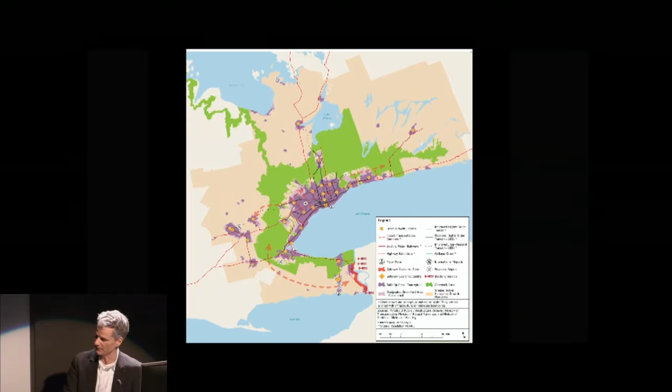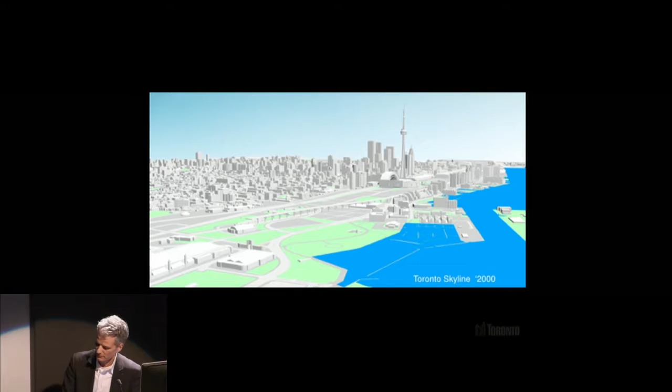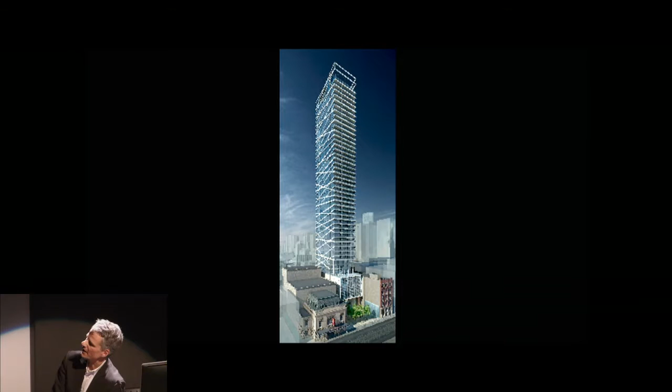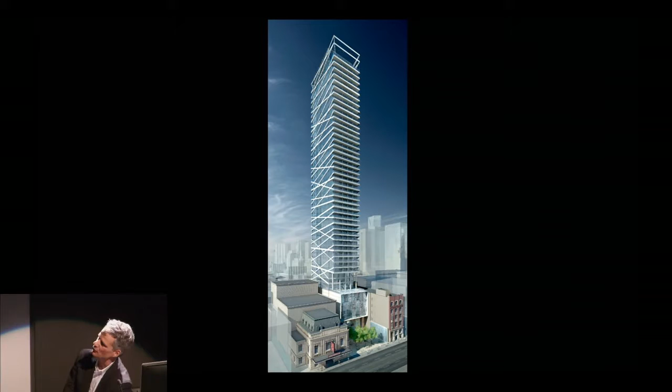This first project is the Theatre Park project, a sliver tower next to the Royal Alexandra Theatre, located in a parking lot that used to be a playing field owned by Upper Canada College. For the longest time it remained an undeveloped parcel. The city prescribed an 8-story warehouse building with punched windows going the depth of the site, but given the cost of the land, that scenario was undevelopable.

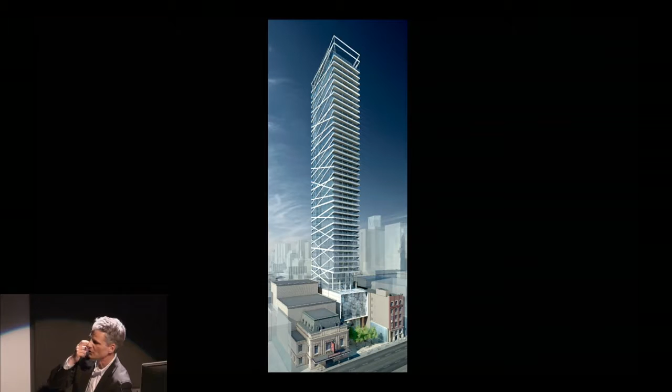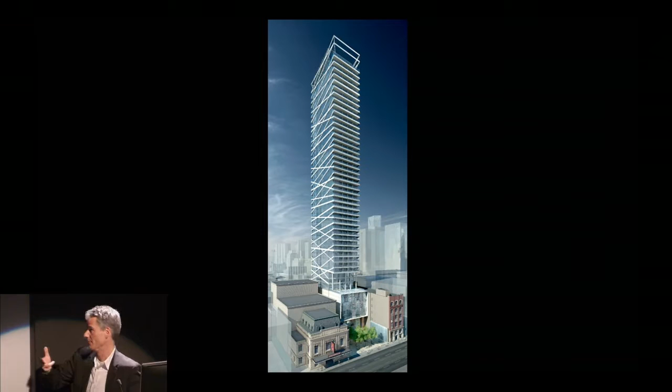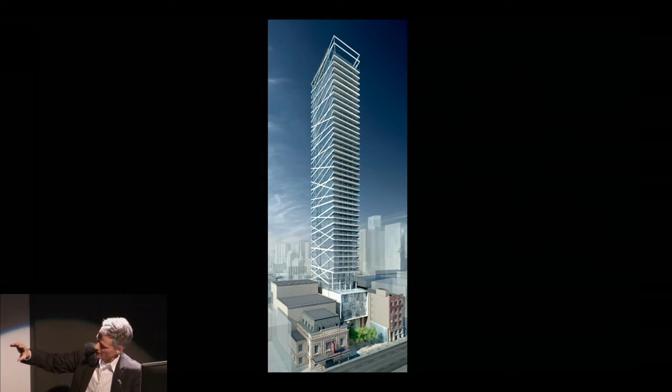So through a lengthy process of negotiation and redesign, we developed this tower as a sliver tower. It's deferential to the theater in the sense that the tower is lifted up above the fabric of the historic buildings. It's pushed back to create a forecourt off the side of the theater, and establishes a datum of podium elements that relate to the scale of the heritage fabric.

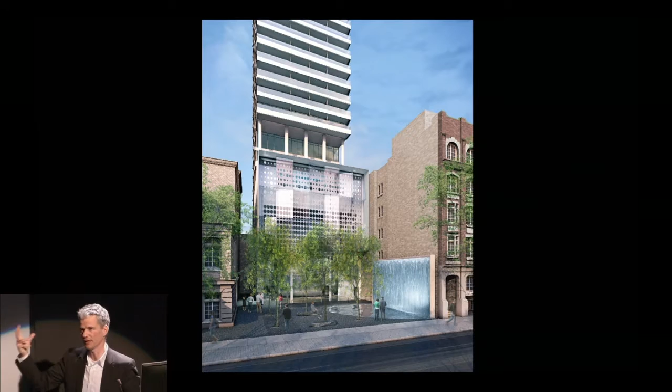So this looks at the podium and the relationship of scale of the elements. This building also has a full range of units and is mostly end-user occupied, meaning it's not investors that bought these, but people who have embraced this building — most of the people living there are the ones who bought the units. There's a wide range of units, so it really represents the spectrum of Toronto.

This is the base of the building, which will house a restaurant, and that plaza will eventually have outdoor seating for the restaurant. Then the upper stories are the amenity areas for the tower, and there's a pool on the roof — also an outdoor pool.

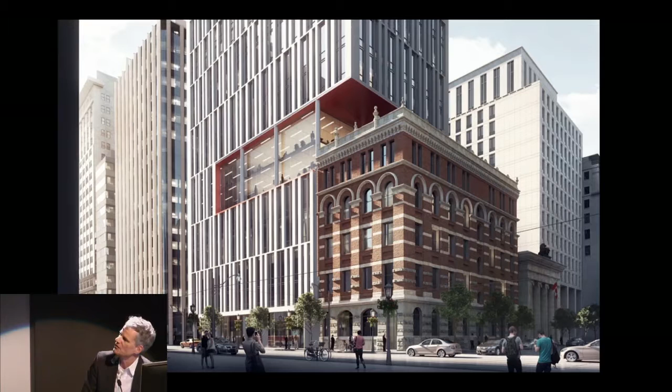This shows it from the other direction, and you see that the facade is an abstraction of the vertical pier facade common to a lot of bank buildings. We're playing with it using a skip-stop patterning, then making a definitive incision in the facade, cutting it out right in line with the heritage building to make a direct visual connection to it.

There's a great degree of public open space and landscape planning put into it as well. This is the next phase of the project, an interlaced tower where we interweave large post-tension concrete terraces to create deep terraces for amenity, given the great views of this location—that's the unique feature of the building.

This is an example of an older project in the office, relating to mid-rise, and an early example of the evolution of mid-rise in the city. We call it a new unplanned neighborhood.

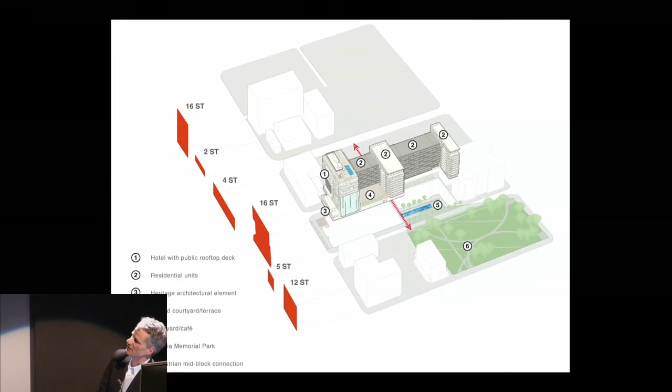This is a project called 550 Wellington, which happens at the convergence of Bathurst and Stewart Street, a complex scenario where you have the heights of buildings on Bathurst, and then step down to a consistent height across Stewart Street. What's interesting is that at the time, the city considered this a vestigial industrial area, not really part of the downtown core.

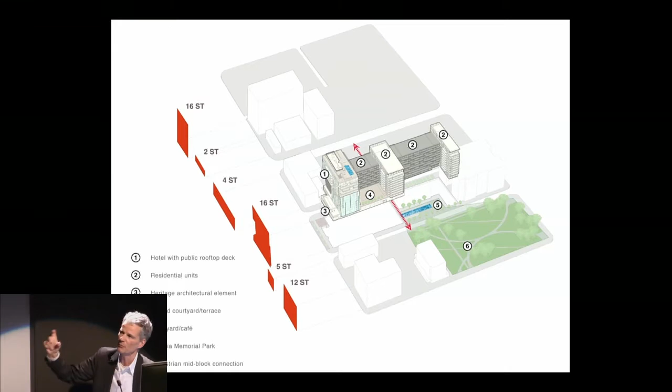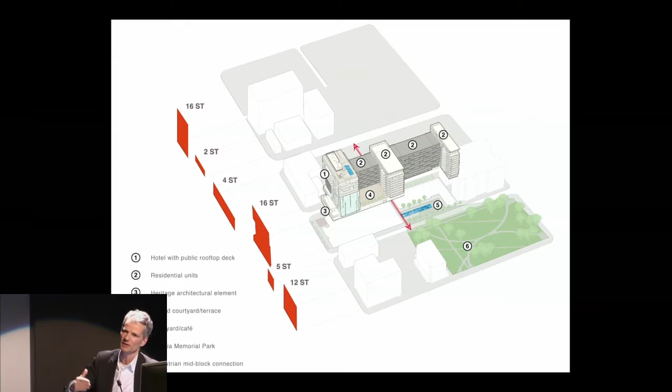It was really the vision of the developer, Peter Freed, who started buying up lots and developing small buildings, building on his own hype around the neighborhood, which slowly transformed this area until this final building, the 550, was built, incorporating a boutique hotel and residential units.

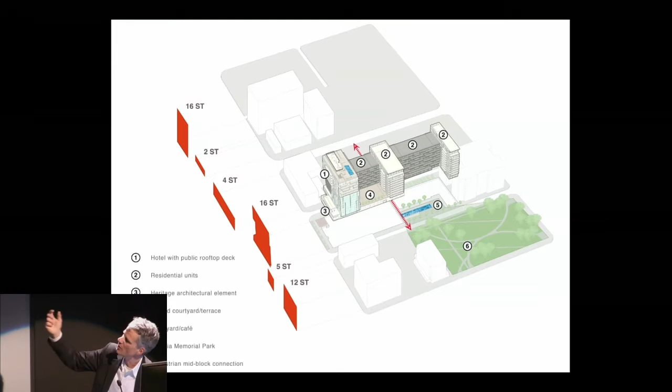The building has various faces: a special hotel tower on Bathurst, a long bar building which establishes the height datum of Stewart Street, and a series of two forecourts on Wellington which address the park and create amenity for the building itself.

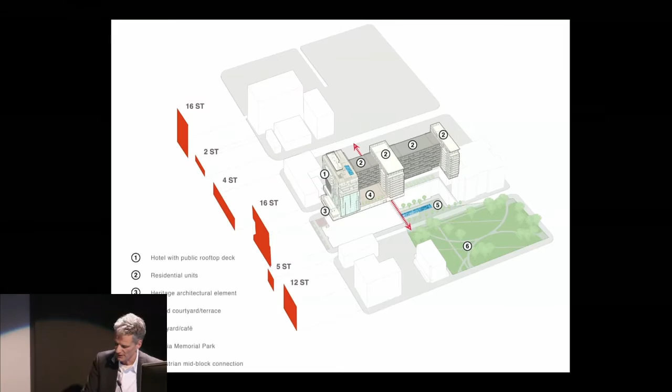I think on Stewart Street, out of that process—since there was no real planning framework for height and massing—we worked with the planner to establish a height datum. Now when you look at Stewart Street in particular, it's one of the nicer streets in the city core.

This looks at the forecourt and the entrance to the hotel.

And of course, with higher buildings, you have the opportunity to create great public space up higher, and this is the rooftop horizon edge pool and deck.

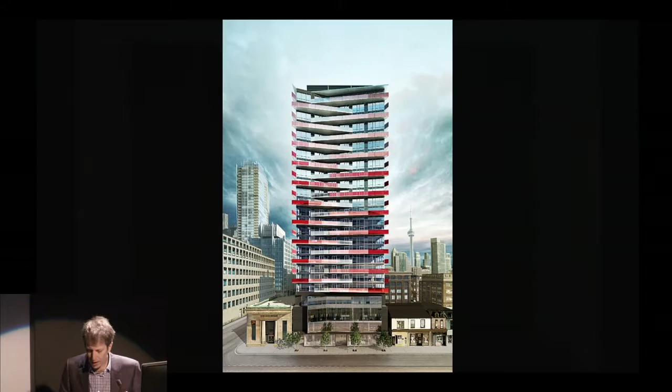In examining this area and looking at people moving back downtown, it became a real opportunity to do something a little bit different. What we did with our client was try to look at what you needed to live in downtown Toronto, and also rethink the traditional bathroom, bedroom, kitchen setup that people live in.

This was conceived as really trying to think about what you needed. Do people really cook at home anymore with Uber Eats and everything else? Do people hang out in their units? Do they socialize on the street in the bars and restaurants and all these other things? So what we tried to do was find a way to shrink these things down.

These units are actually incredibly small. We had to redesign some of them in the building because the average size was less than 400 square feet, and they couldn't get mortgage financing for the owners.

Part of it was questioning, for example, this kitchen and seeing what other things you could bring in there and what other spaces you can combine, and what other storage spaces you can bring in. So this is a kitchen with all your laundry, your storage, your dishwasher, everything in there, just shrunken down. And it sold incredibly well.

What we're seeing, or hoping to see, since no one's moved in yet, is that it's helping—it's just one part of a whole revitalization of these downtown areas, making them neighborhoods as people move into the streets, move back to the downtown core where now restaurants and shops and all sorts of things are coming back to parts of the city that no one used to live in. And it's really revitalizing it.

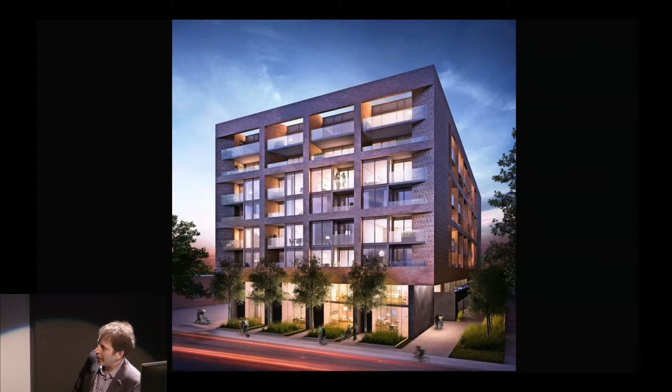And now for you guys, some mid-rise. This is actually across the street from one of your sites, or across the rail tracks, on Sorauren Avenue. It was recently completed, and it's just west of the rail seam that goes by the Sterling Road site.

It's interesting because it's basically the edge of the High Park neighborhood, which is an incredibly expensive and somewhat exclusive neighborhood now. One of the issues throughout the city is affordability. What this building did, by building on a rail seam in its backyard, was bring an opportunity for a lot of people to move into this great neighborhood at a more affordable cost.

The idea was a playful reinterpretation of the industrial warehouses that historically lined the rail seams—all along here were old warehouse buildings. We wanted to reinterpret that, taking the heaviness and massiveness of the masonry cladding and reinterpreting it. So the idea was that it kind of floats two stories off the ground, and it's carved out.

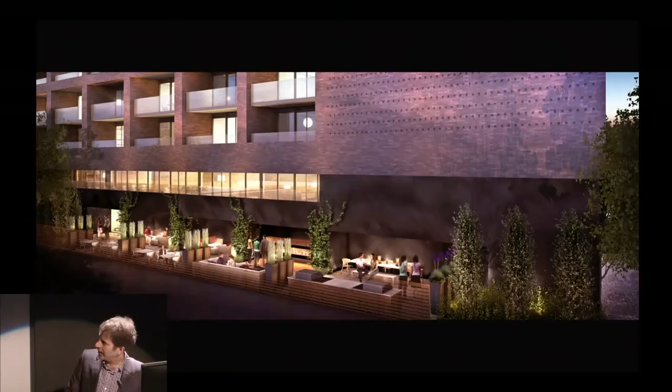I think we presented a lot of plans a few weeks ago, so this is what it actually looks like. But it's quite a beautiful building if you've looked at it as you've walked by.

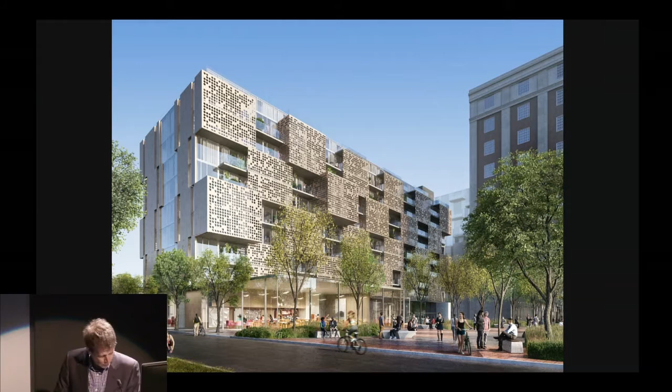And then onto one of our sites, 158 Sterling, another interesting project that's been marketed, and we're just dealing with soil issues right now.

It's another interesting part about residential construction in that this one literally subsidizes the cultural realm. This project is a whole brownfield site. On Sterling, there's the existing 10-story automotive building, which you see in the background. This project allowed our client to create some residential density, which was worked on with the city, and the whole site was rezoned.

But what it did was subsidize a new gallery. So MoCA, the Museum of Contemporary Art, is going to take over the bottom 5 floors of this building and get a whole new gallery space, which is basically going to be subsidized by the residential density adjacent to it.

Within this mid-rise building, one of the things we looked at was thinking about the units, but also how people live in them and what would happen if you're closer to the ground. So we were interested in exploring outdoor rooms. These screens, and behind them in addition to balconies, are actually enclosed spaces that aren't weather tight, so the living spaces are expanded into the outdoors, with a semi-private area that mediates between the interior private realm and the public realm outside.

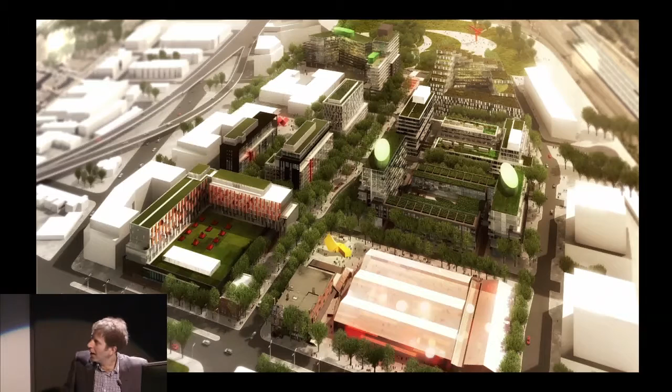The last one is a project I spent way too many years of my life on, the Pan Am Athletes Village. This one is kind of an interesting, hopeful experiment.

As Rob alluded to, most of our work and most of the projects going up in downtown Toronto require rezoning. With the growth plan, the zoning bylaw in the city never got changed, so there's suddenly huge pressure to build, and the city has never gotten ahead of it. So it's worked out on a case-by-case basis.

But with this area, because the lands are controlled by the government, they got ahead of it. There was a huge amount of effort, 10 years before we got involved, of master planning that produced a very tight plan and massing envelope, very much mid-rise, defining all the streets and avenues. They focused on making really special public areas, beautiful streets, and wide boulevards.

This is Front Street in the middle. Has anyone been down there? Yeah, you went on a tour. It's got pretty nice granite curbs.

It's a very interesting experiment for us because it's also truly a mixed-use community. What happened was, in part, the residential uses—there are 2 condominium buildings that were built to start with, and we're just starting up another one right now.

But what happened was it was used to leverage 2 affordable housing buildings, a new George Brown Student Center, and a new community center with the YMCA. All those things were brought to bear and supported by some of the residential uses, and also government subsidies. It's truly a mixed-use community, and a master planned one at that.

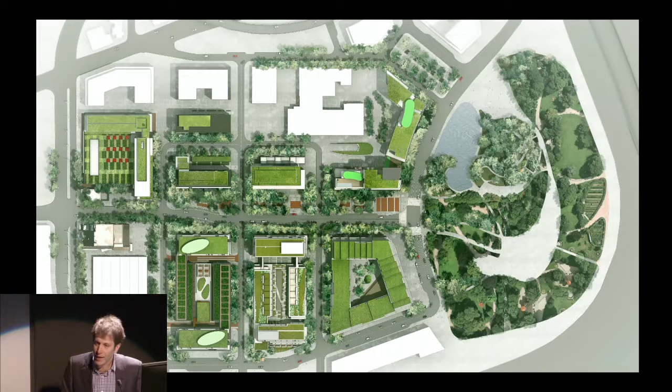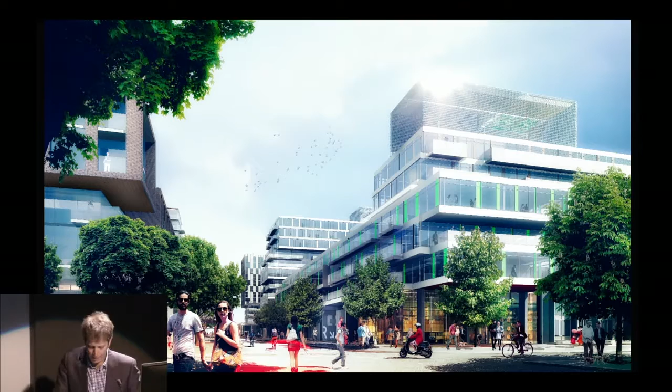This is coming soon—this is our building that didn't get built. But we thought it was an interesting typology as a sort of mid-rise, but it's also a courtyard building.

We looked at different opportunities from the mid-rise typology in increasing grade-related units. This one actually brought the courtyard up to the 2nd floor above a partially above-grade parking garage, allowing for more grade-related units. We're just starting work on it now, but we're going to try and keep all the ideas the same.

Just looking at the amenity of the space and new approaches and different challenges as we move a bit further away from the high-rise typology. So that's kind of the work of our office these days, and an overview. Thank you for your time, and hopefully there's some interest in that.